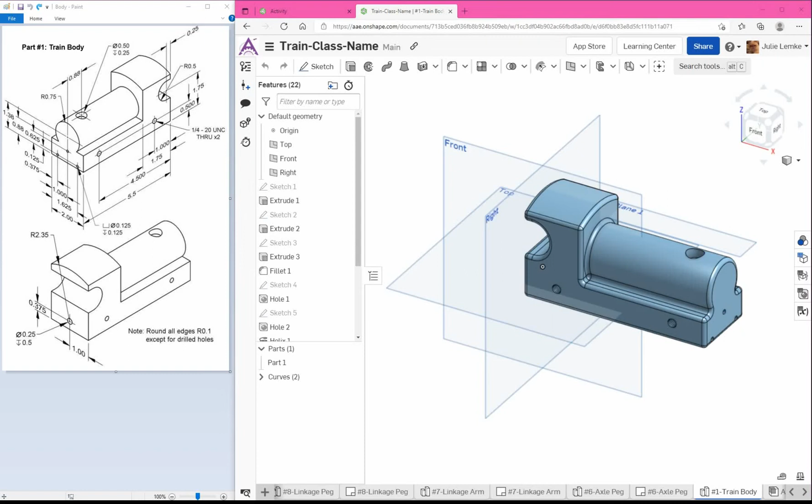In this video, we're going to be going over how to make the working drawing for the train body. So we're going to go to the plus sign, create drawing. This time we're going to be using C instead of A. Typically it shows the ones you've been using, but if you go to ANSI, it should pull up all the different options.

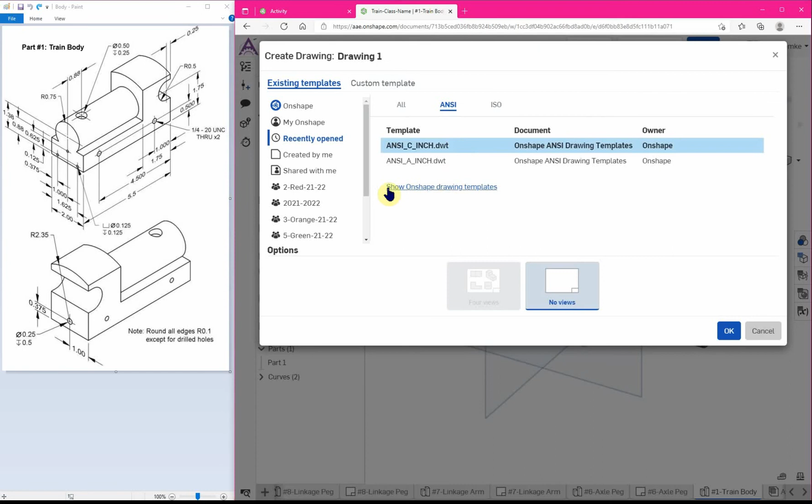And then if it doesn't, just click on Show Onshape Drawing Templates. It should be able to load more of them than the ones you currently use. And as you can see, I kind of only use 2. So ANSI, C, inch. And again, if it doesn't show up, click on this right here. Okay, then click OK. All right, so it's opening up.

So the reason why we're doing a size C this time is because size A is the size of 1 sheet of printer paper. Size C is the same size as 4 sheets of printer paper as if you were to tape them all together. The reason why we're going to need to use a much larger sheet for this is because all our parts that we've been working on previously are quite small. But this piece is 5.5 inches long, so putting a few of those views on 1 sheet of paper is just not going to fit really well, and also being able to see all the dimensions. So we're using a larger sheet of paper.

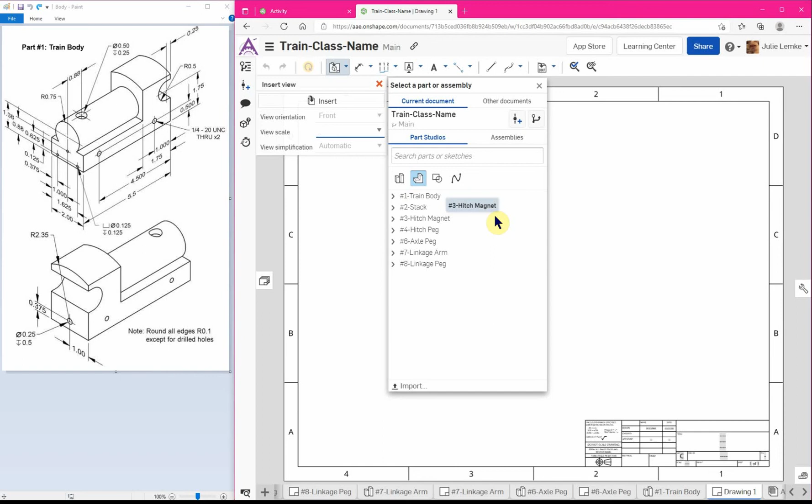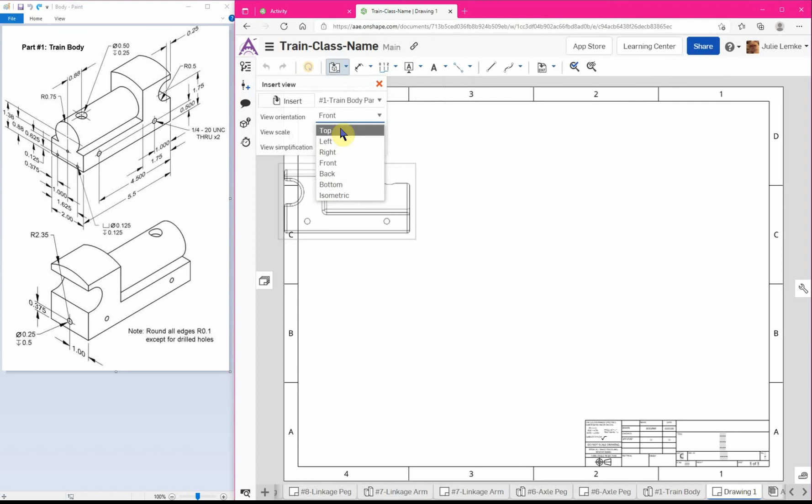So we're going to bring in our train body. This time, instead of putting it right over here, we're going to put it a little bit more in the center. The reason for that is we're going to use the right side and the left side. So if your train doesn't look like it does in my front view, go to the view orientation and just kind of play around until you find the one that matches the same view that I have.

All right, so we're going to place in our front view, our top view, our right side, our isometric, and our new one, the left side. Alright, so I hit escape to back out of the tool. So now I'm going to show hide and then show shaded. So I have my isometric shaded in.

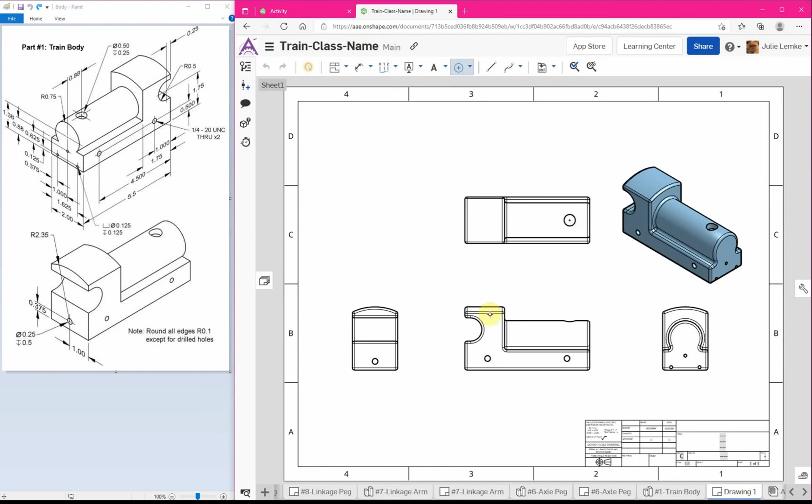Next, what I can do is, let's see, where is it? Center mark. Add a center mark to all the holes that are drilled in, and then also to the large arcs that we have. All right.

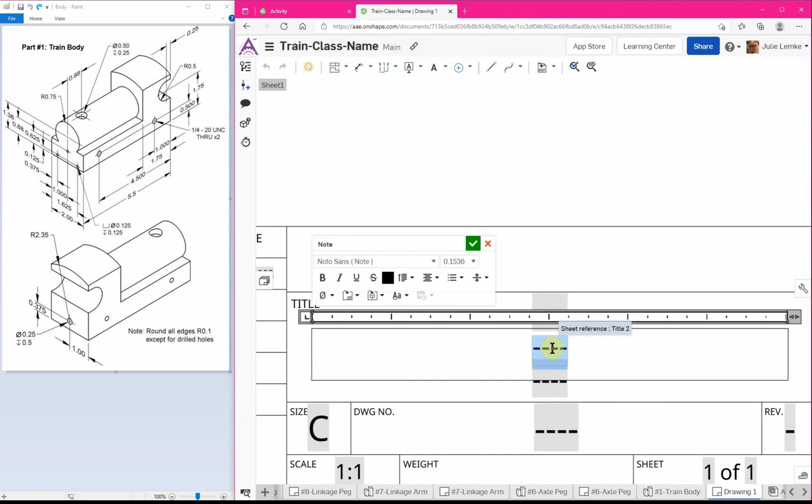So for here, also, just because I don't want to forget about it, we're going to change our title. So we have train body and our part number, part 1. And I'm going to do this now just because I keep forgetting it in all my videos. I'm going to rename also the drawing tab. Okay, so hopefully you haven't been forgetting to change those. I remember to change them right after the video, but this time I remember during.

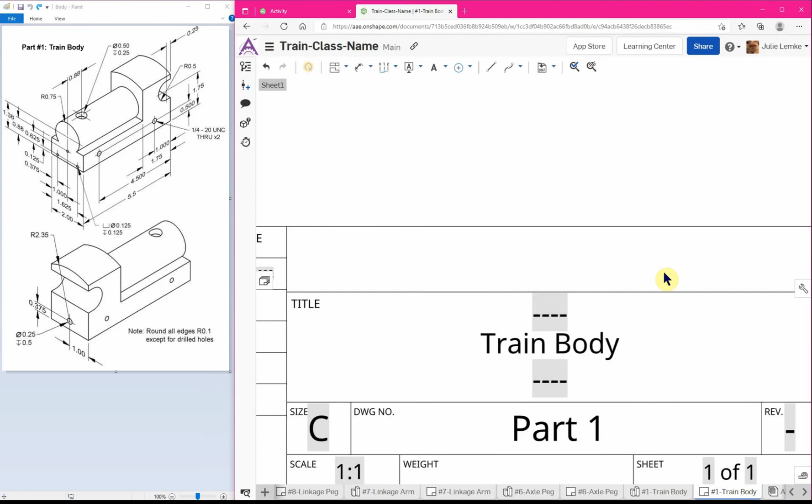Alright, so from here we can start adding in some of our dimensions. Okay. So we could use the hole callout. We're going to use it on some of the holes that were drilled into our part. Okay, with this one, I'm going to actually change something on it. So I'm going to scoot that over so you can see it. So in this little spot right here, I'm going to do space TYP in all caps.

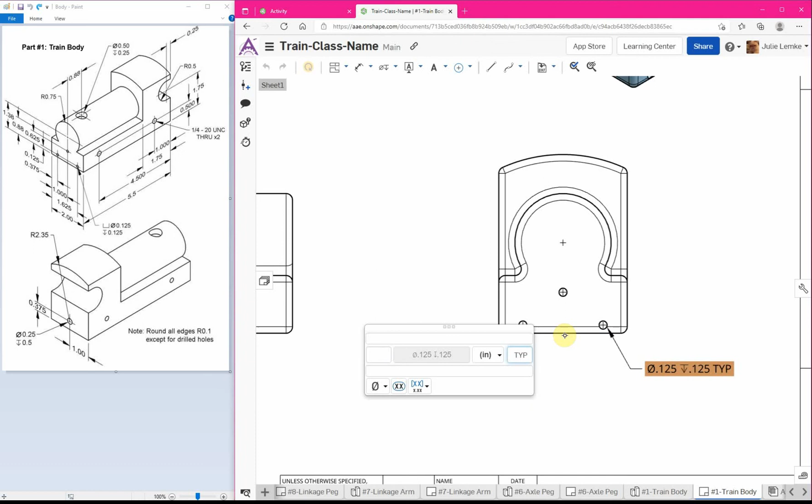Alright, the reason for that is there are 3 identical ones on this one view, and instead of having it multiple times, because this is going to get very messy when you start adding in all of the location dimensions, having one size dimension, this right here for all the holes off to the side, will make it a lot easier without having anything overlap.

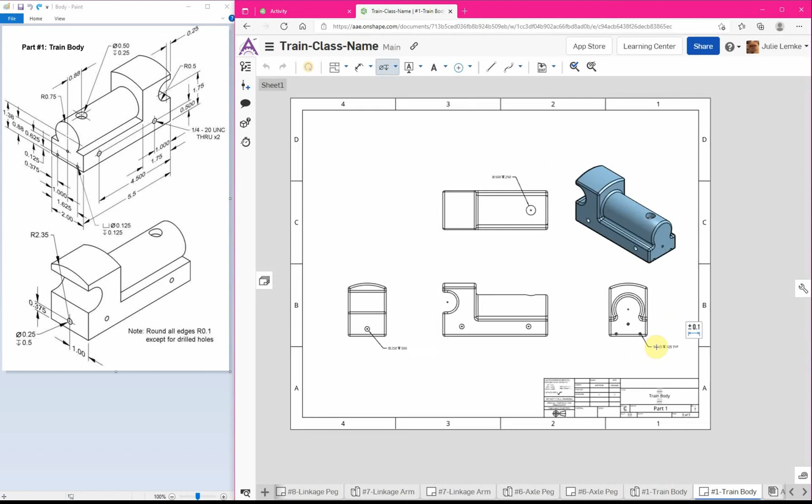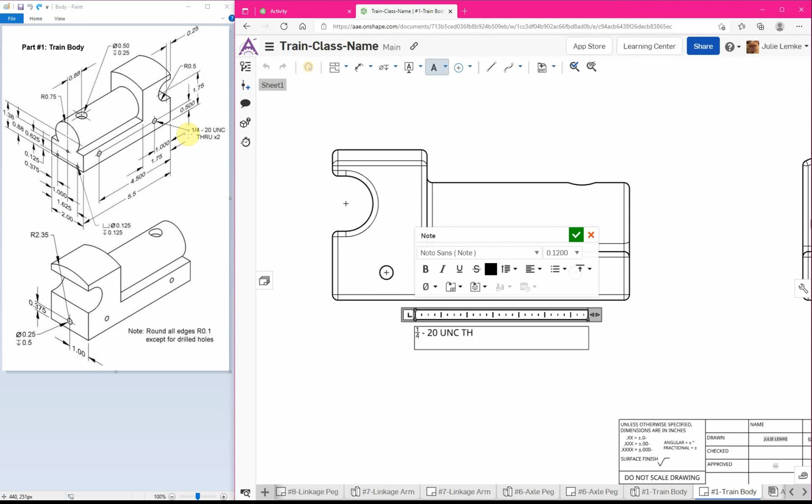Alright, and then we can go over to here, and for this one I'm going to put it in as a note, so I can type it in, and if it flips to a fraction like that, that's fine. If you're wondering what I'm copying down, it's this portion right here. Okay. So what that stands for is the thread information.

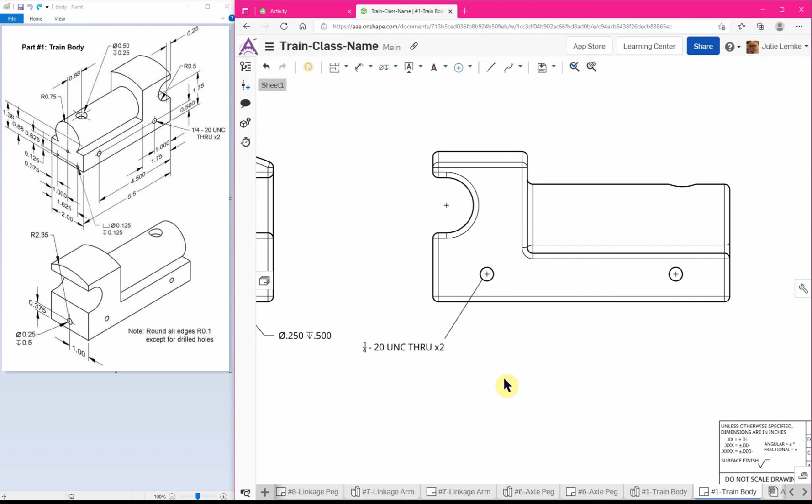And we're going to use the line tool. And actually I'm going to have it go this way. I'm going to move this over. Okay, the reason why I'm doing that is, again, so when you add in the location for both of these holes, you don't have this dimension being too much of an interference. If it is, just kind of move it somewhere else that makes more sense for your particular drawing. All right, and another note to add in.

All right, so this right here is a note for rounding all of our edges. That's this little note over here. The reason why we're putting it off to the side is just because we'd have to put in so many locations on our drawing that it would clutter it up. Things wouldn't be visible. It'd be hard to see what's going on.

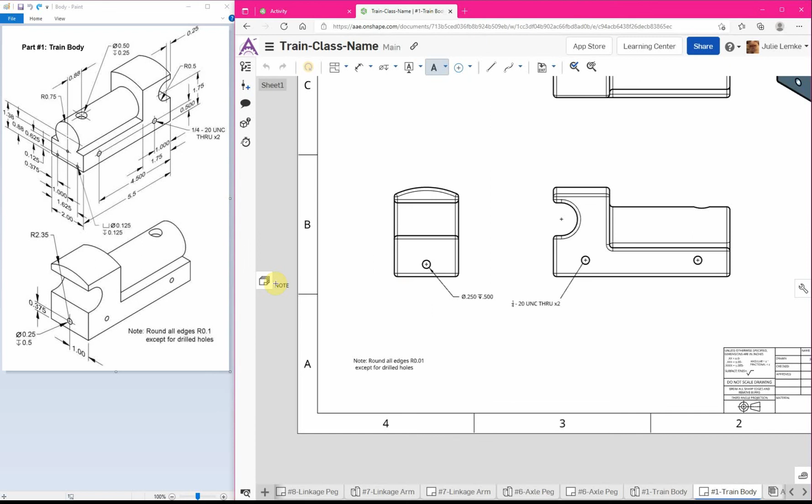And also you probably noticed that for the center mark, I left it off of all of the rounds and all the fillets. The reason for that is the same. It's just going to get too messy if we add them in, so we're leaving them out. And that's why we have a note off to the side.

All right, and just to go quickly over what I mean by size and location dimensions, I'm going to use this dimension right here. All right, so what you're seeing right here is the two that I just added in. Those are the location dimensions for the hole that's drilled in. And this one right here, that one is the size dimension.

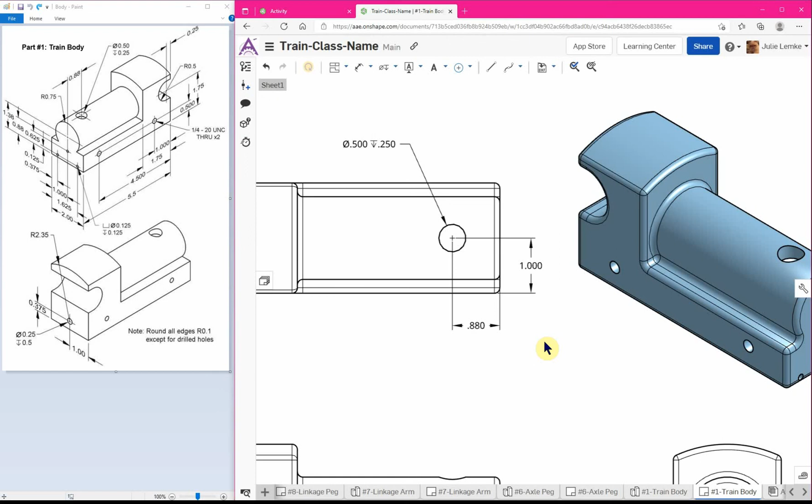So you need both. One is going to tell you what size the hole is going to be, so the diameter and the depth, and the other one, these location ones, will tell you where it is placed on your part. So make sure you have both pieces. You don't want to have just one of them.

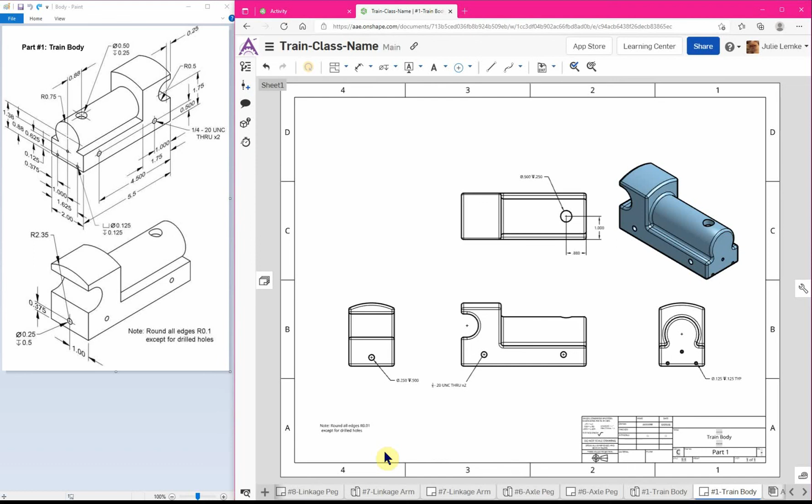All right. So for the rest of this, I'm hoping you're going to be able to do it all on your own, because there are quite a few more dimensions, as you can kind of see with this little drawing over here that was in your packet. There's a lot of different components to add in. Hopefully you're able, again, to do them. If you have issues, please let me know and I can help you. But again, make sure you finish adding all your dimensions.

One suggestion I do have is with your packet, as you're adding dimensions in, cross them off on the packet. That's actually how I normally do this, because it makes it a lot easier to make sure I didn't accidentally miss anything. All right, good luck.